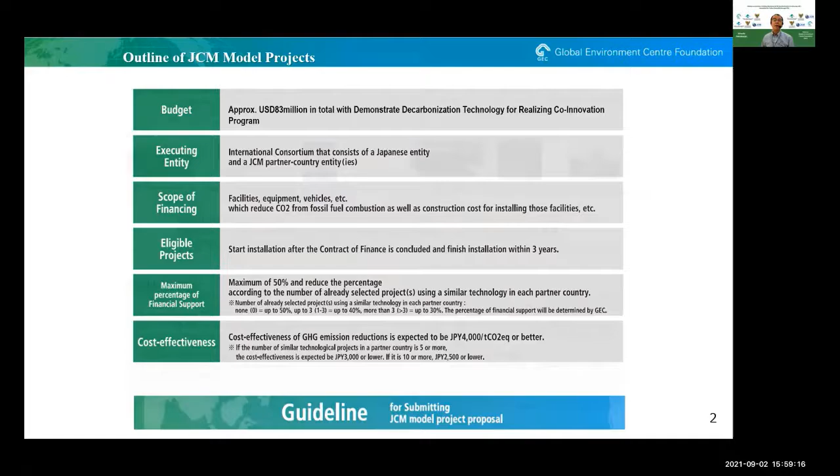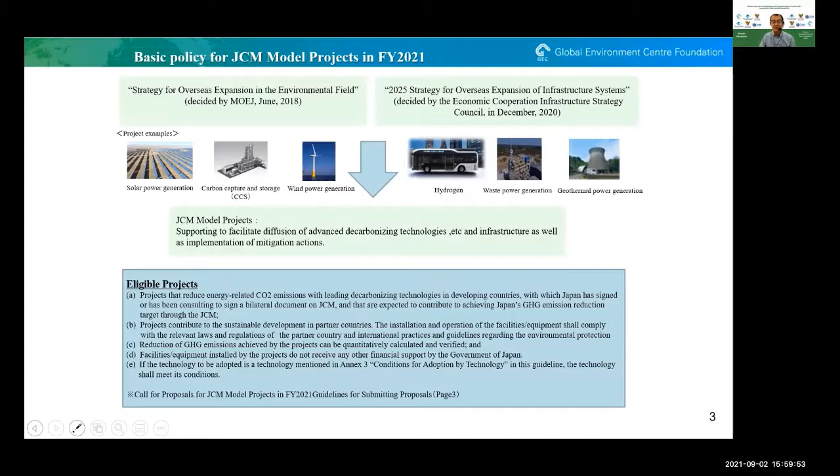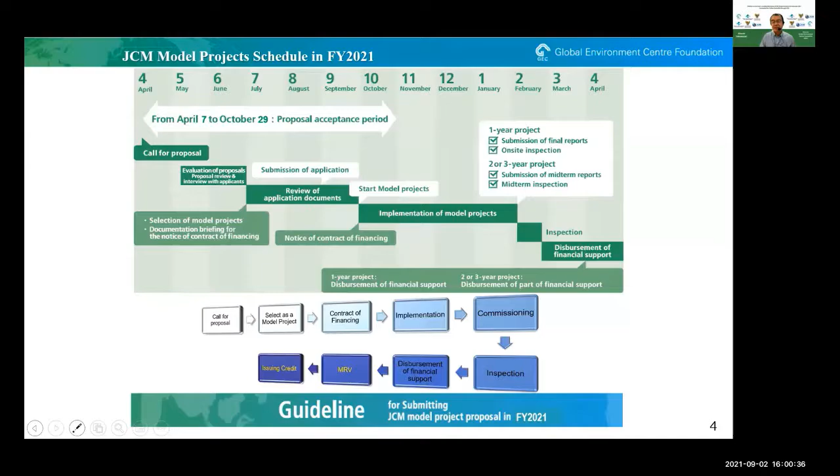We consider this criterion of cost effectiveness, that is finance versus amount of greenhouse gas emission reduction, important to dispatch limited budget effectively for excellent projects. We set this value less than 4,000 yen, or about 40 US dollars. Recently, there have been a lot of proposals for certain technologies in some countries. If the number of applied technologies exceeds 5 in a country, this value decreases to about $30. And if the number exceeds 10, it diminishes to about 25 US dollars.

Solar power project is very popular in JCM Model Project. It counts the highest number among the variety of proposed technologies. We welcome this renewable energy project as a good energy source replacing fossil fuel. On the other hand, we need to confirm that the proposed technology is advanced, so we set the condition for photovoltaic module conversion rate from optical to electric energy to be 20% or higher.

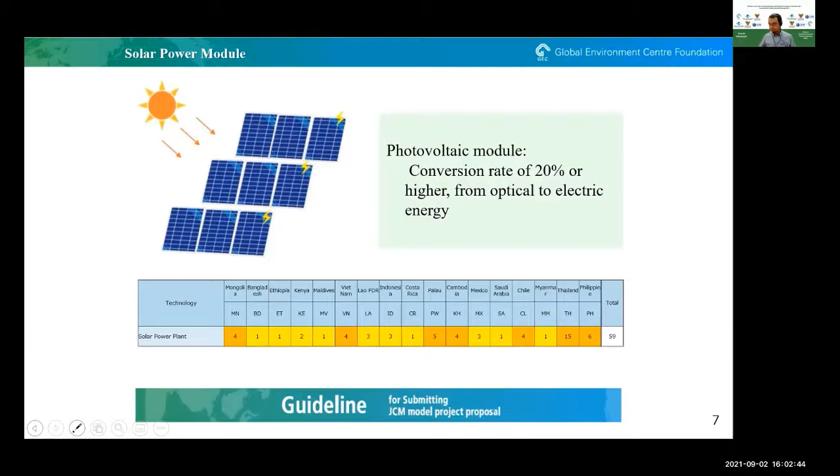Although a lot of solar power projects have been selected, there is still room to increase total performance for this system. One such good way is to employ battery or accumulator in the system. We'd like to promote this category by making conditions clear for participants applying this technology. These are the points we require for this technology.

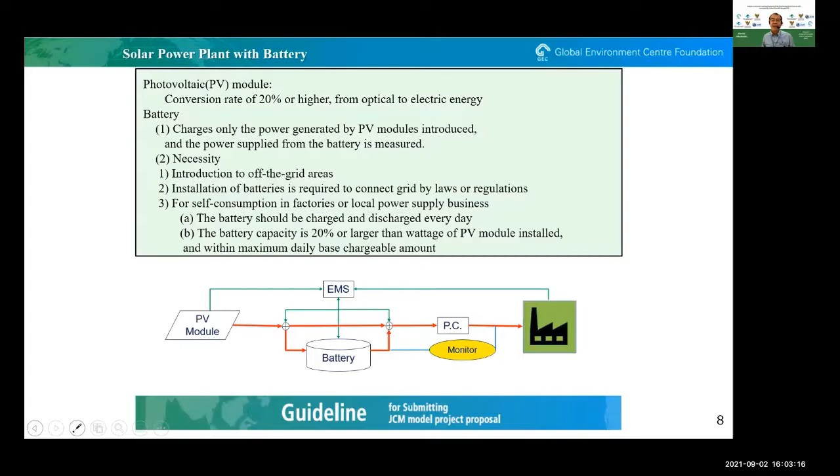This is the first one. This project is a solar power system organized by Sumitomo Forestry Corporation as their first JCM Model Project. They are a forestry company conducting environment-friendly activities, and this is one of their actions. A 3.3 megawatt solar power system will be installed on the rooftop of a factory to generate renewable energy consumed in the factory.

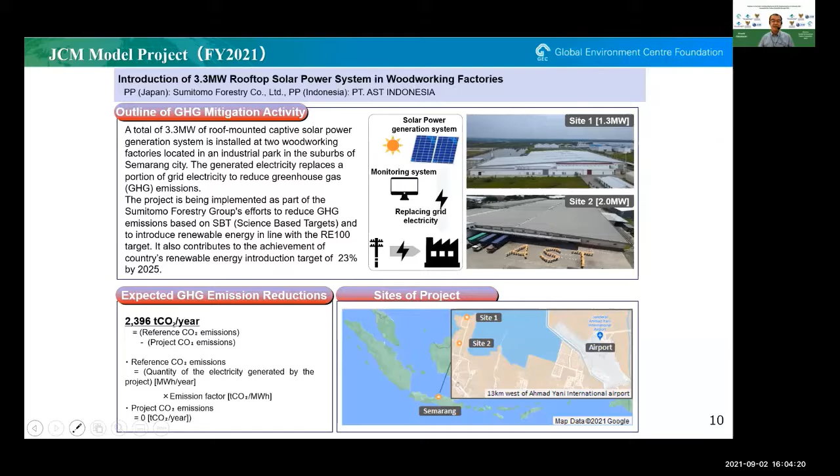This project is organized by Fumakilla, who is one of the famous insecticide and repellent manufacturers. We hear they are doing good business in Indonesia for their product. It is needed to protect people from infectious diseases such as dengue and malaria, and their product effectively keeps away mosquitoes and other insects.

The system is planned to be installed in their branch factory near Jakarta. To produce their main product of mosquito coil or repellent, high and stable temperature is required for production, and this oil heater works well. So this high efficiency thermal oil heater system is a new technology. These 2 projects are organized by newly selected representative participants, and we will follow them until completion of their projects.

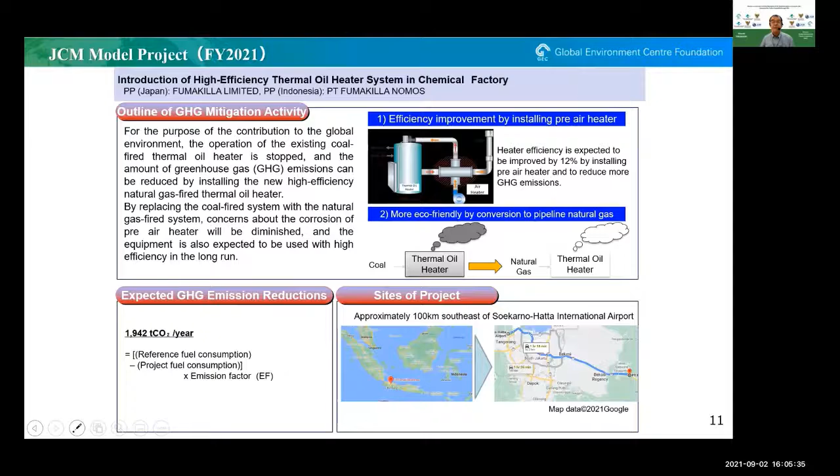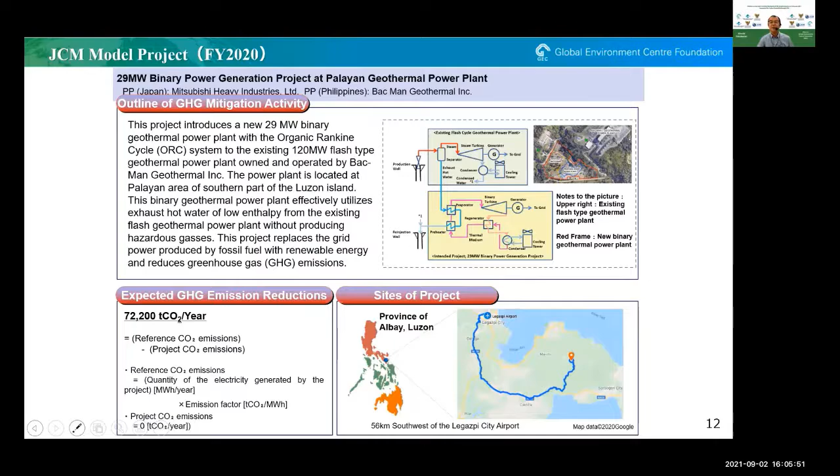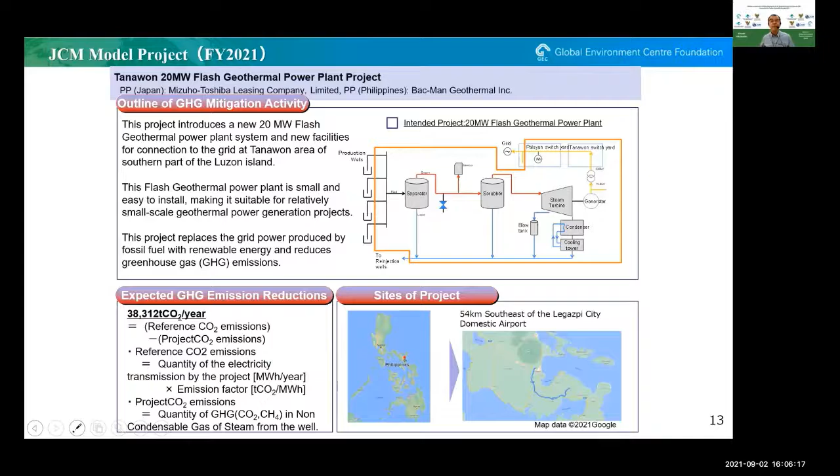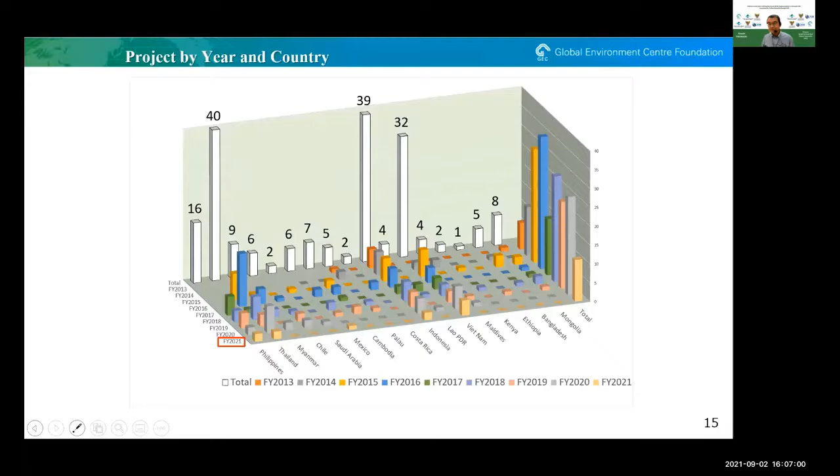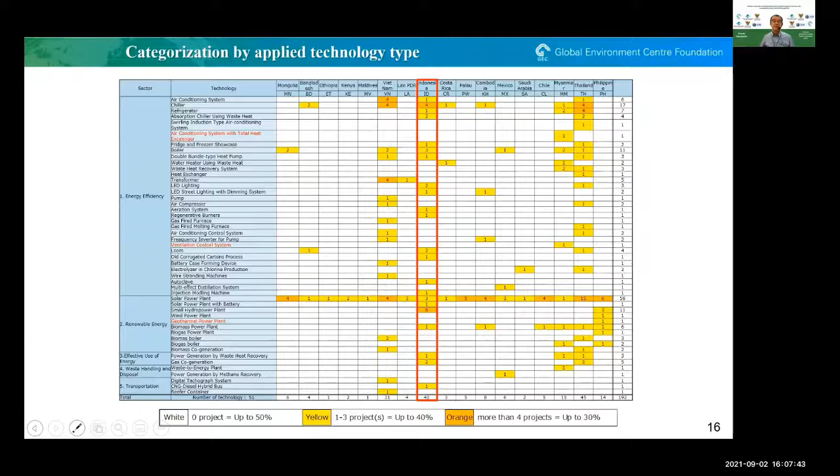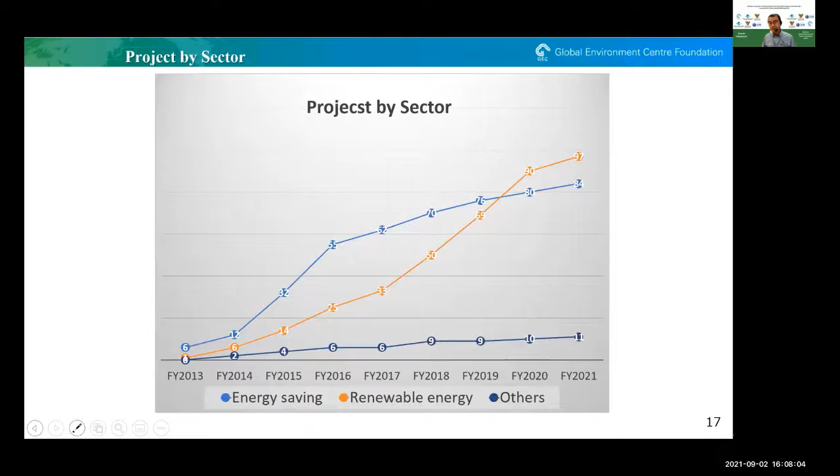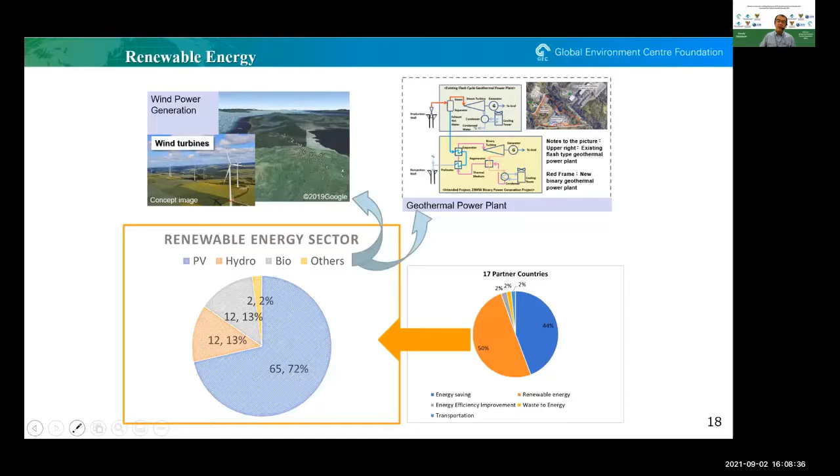This is the renewable energy sector. Photovoltaic system covers over 70% for all partner countries. The second is mini hydro system, which is getting popular in Indonesia, and bio power generation system. In this sector, we recently added wind power and geothermal power generation system as new technologies. We anticipate having more proposals and adding variation in this field.

For the energy efficiency sector, we could add some new technologies recently. This sector is important, especially for factories and industry, so we continue to create these technologies. One of the good projects is autoclave. For infusion manufacturing, autoclave is one of the main requirements to sterilize products completely. Keeping hot water at a stable high temperature is required. The system introduced effectively minimizes loss of heat and reduces consumption of natural gas for steam generation.

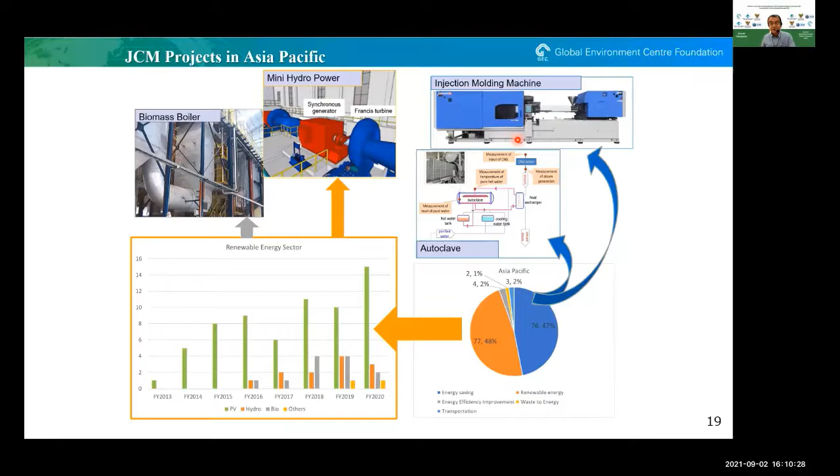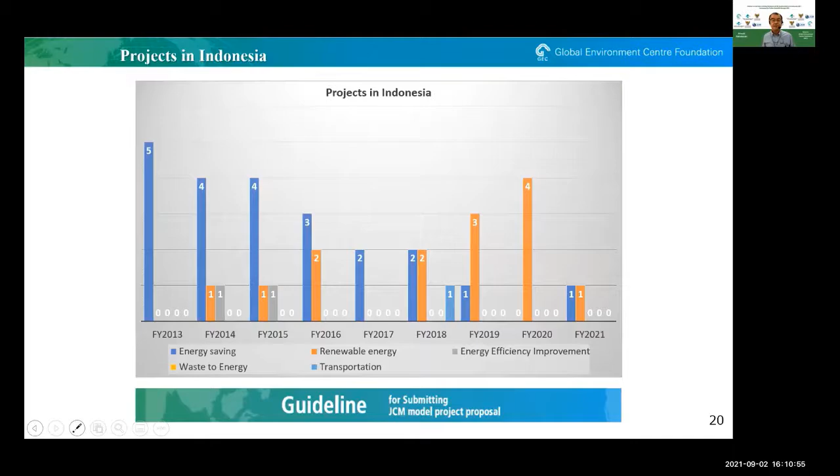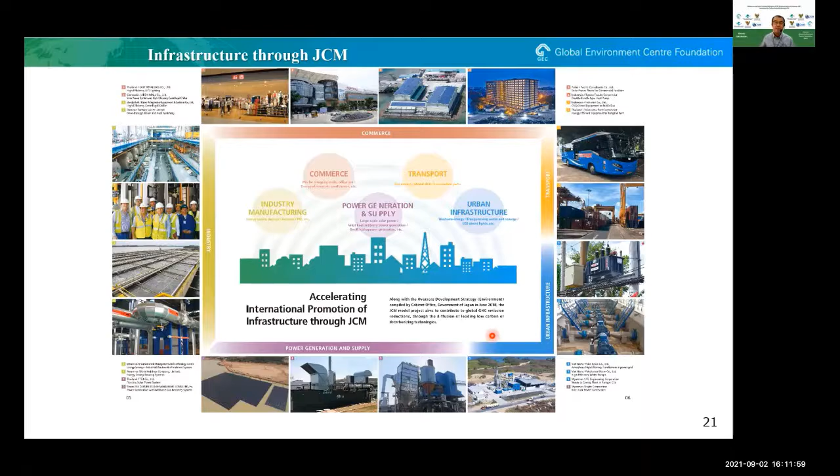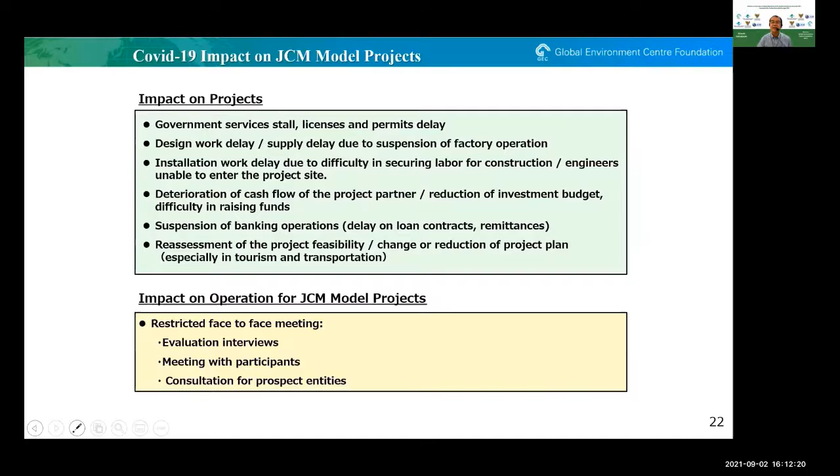COVID-19 imposes trying times on people in Japan, people in your country, and everyone around the world. JCM model projects have also been affected by this pandemic. These are the points that are causing influences on the project.

Project participants try hard to complete their project on time, even in this pandemic. We have to support participants toward the successful completion of their project. What they are trying to do is foresee the risk and make a contemplated schedule with as much margin time as possible, modifying and adapting the project plan flexibly to recover from unexpected events and minimize delay.

We could keep our activity going even in this restricted environment, holding meetings, consultations, and seminars online like this moment. It is true that COVID-19 limits our activity. However, we keep our activity going by these alternative or recovering ways, so as not to deter action on greenhouse gas emission reduction for our precious environment.

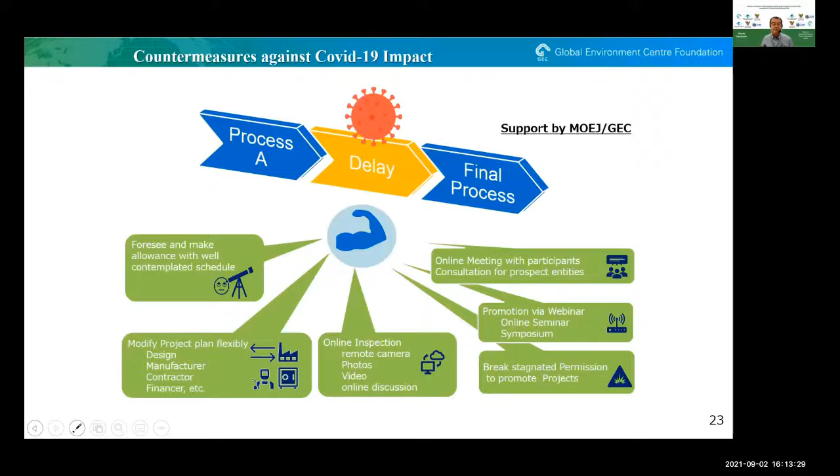And that's all from me.